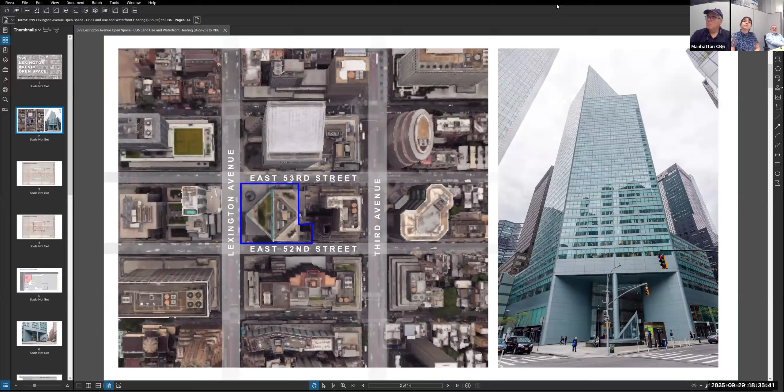So the 599 Lexington Avenue site has full lot frontage on the east side of Lexington Avenue between East 52nd Street and East 53rd Street. The 599 Lexington Avenue Commercial Office Building, which you see on the right-hand side, was constructed pursuant to a special permit in 1984.

The 1984 special permit was for major subway improvements, which granted a floor area bonus for construction of new entrances, subway connections between the 53rd Street Lexington Avenue Station and the 51st Street Lexington Avenue Station. The new entrances, marked in turquoise arrow on the screen, are widely used and located at the southeast corner of Lexington Avenue and East 53rd Street and along East 52nd Street.

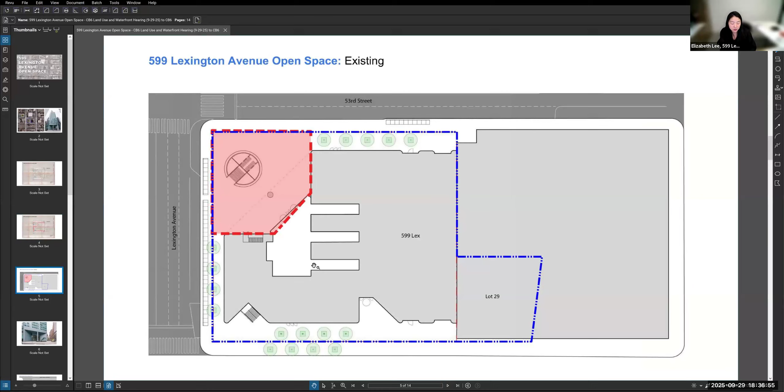Given all of the work the applicant has been doing in the area, including the Hub at 601 Lexington across north of East 53rd Street, the applicant also wanted to upgrade this space with pedestrian amenities that the community can use and enjoy. So in 2023, in coordination with the Department of City Planning, the applicant temporarily installed amenities on a trial basis to test fit the size, placement, and configuration of various amenities. Upon initial installation, the public's response was overwhelmingly positive, with increased usability of the space.

The next slide shows the layout of the pedestrian amenities, which includes 3 modular hexagonal seating and planter clusters and planter boxes for small trees and shrubs. This is what you see on the site today, and this is the proposed layout.

The clusters are strategically located so as not to obstruct pedestrian circulation paths and access to entrances, the subway, and the building's lobby. As you can see with the dimensions marked here, they're very generous and provide no obstructions for access to the subway and the entrance to the lobby, right at the cursor where I'm pointing. The planter boxes for small trees and shrubs are also placed along the edges to soften the edges of the buildings where it lines with the building's blank walls.

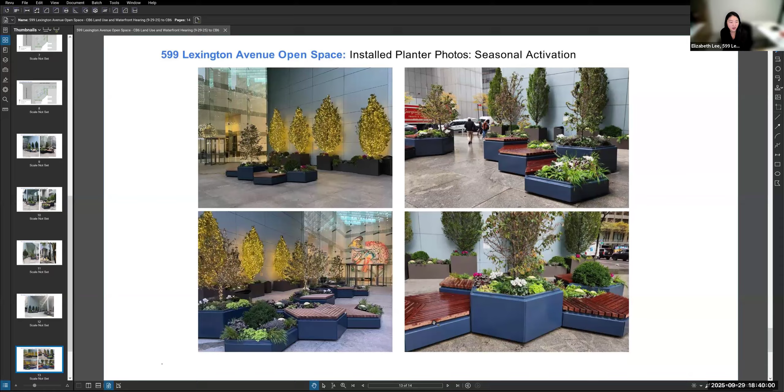We think these amenities, along with seasonal plantings and lighting, really create a vibrancy of the space, creating an urban oasis in the heart of East Midtown. Lastly, in order to make this amenity a permanent feature, we have filed an application for a non-ULURP modification to update the previously approved Z-3 drawing sheet, which is essentially the site plan under the 1984 special permit. So that's the action that we are bringing before the community board.

Thank you. We'll take any questions you may have. Does anybody have any initial thoughts or questions?

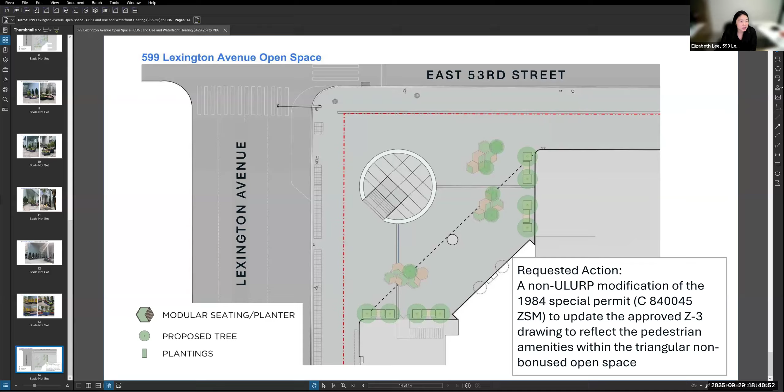Initial question: how does this area fit into the agreement for the MTA easement, which you mentioned at the outset? Yes, the easement agreements are actually within the entrances. So let me go back to the site plan. Okay, so the setback has nothing to do with that and it doesn't impact that easement. Correct, yeah. And then we had provided ample clearances—that's why we have the offset from the entrances.

Can I ask you a question quickly about the easement itself, if you are familiar with the responsibilities of the owner? Are you doing the maintenance of that structure over the steps?

I'll have to get back to you on that. I didn't review the easement right before this call, so in terms of the maintenance, we can follow up.

I just wanted to give you a heads up that the MTA board is voting this week to modify subway service so that the F train will return to this station. So the signage, if it's your signage, will have to be ordered. It's going to start in a couple of months. Ah, no, that's helpful intel. Thank you.

Any other questions? Good question. What is the total seating capacity? Right now, DCP has a standard for seating requiring a certain height and depth. We have 51 linear feet of seating meeting those specific height and depth requirements per the standard plaza regulations. However, we did not count other perchable or other seating areas that are slightly lower or slightly higher.

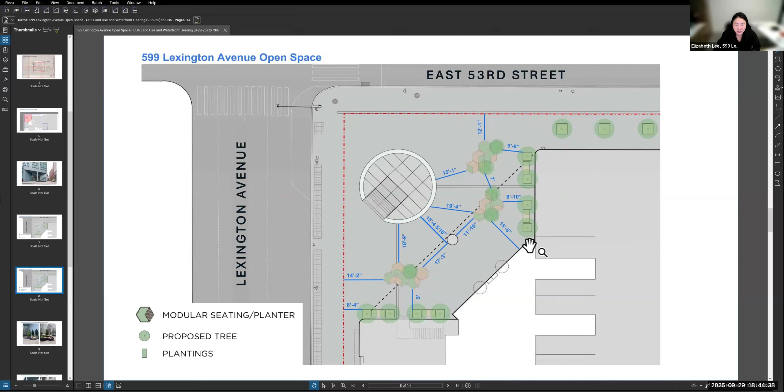We are proposing approximately 3 trash cans within this space that did not have trash cans. It's not marked here, but I believe one's located here, another is probably around here, and another at this corner. Okay, wonderful. It's like I can envision many lunches there. I'd like the lunch to be able to go somewhere when it's done.

Are there any more questions? Well, I have a comment. When I Google map 599 Lexington, it shows on Third Avenue. Well, it takes up a large part of it. No, but it's showing it like on the border of Third Avenue. That's probably Google's problem. Yeah, maybe, but maybe because they're working on it. I also live near here, and they, meaning the building, have special permits because they even have different street lamps and those kinds of things, so I think they own or in some way control most of the block.

All right, so generally, as a committee, are we feeling supportive? No objection. Yeah, absolutely. Does anybody want to write a resolution to that effect for next month? I was just saying, do we have an objection? It's a non-ULURP application. Do we have to? We don't have to.

The other thing I would say, we don't have to, but also if the committee were to write a resolution, it really needs to be passed at the next full board, because this was something that originally came to us over the summer. So it's thanks to the good graces of our sister agency, the Department of City Planning, that we were able to review it at this meeting to begin with.

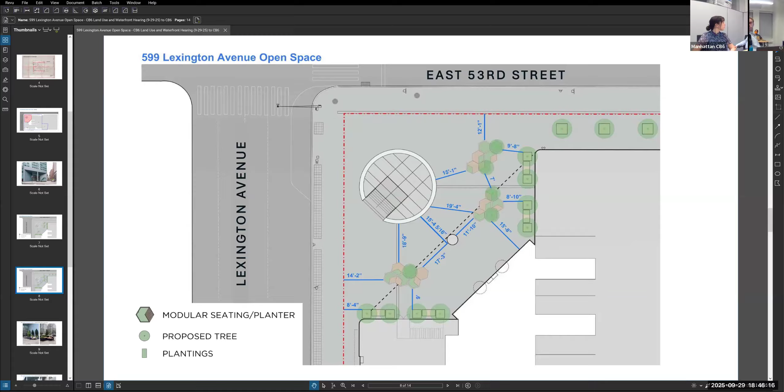Understood. I have a question for Jim. What is your understanding of the difference between no objection and a resolution of support? No objection is just that, no objection. Support is affirmative support of it. I'd like to propose that we be more affirmative in support, because it does seem to be the spirit on the committee that we really like this.

I have no objection.

Miss Lee, are you? We routinely do this with liquor licenses and what have you, so that if somebody comes up and says why did you guys approve this - approval versus no objection is different. It's not approval, it's that we express our support. That application can get you in trouble with people that oppose it.

Have we heard any opposition? No, not tonight. Miss Lee, are you guys looking for a statement of support specifically, or?

We'd appreciate the statement of support, since this will also be presented back to the City Planning Commission for their final vote. It would be wonderful to have community board support.

Understood. Larry, does that mean you're volunteering to write it? All right, thank you. It has to be seconded. I second, thank you. Okay, when I call your name, please say whether you are in favor, opposed, abstain, or not entitled.

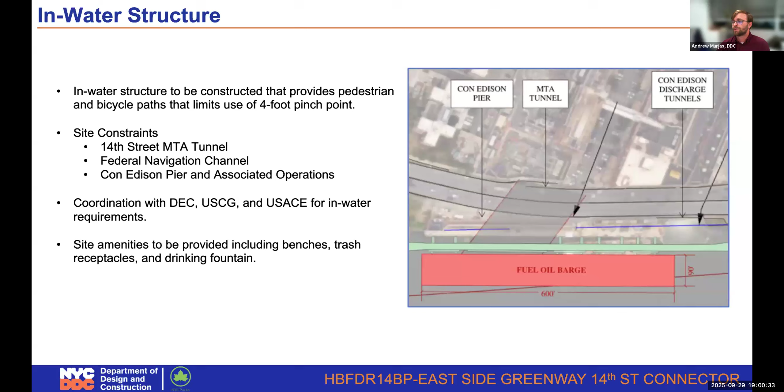But of course, the greenway itself, since this really is a project for the community, we want to make sure the community gets to enjoy the structure. So we're providing several amenities like benches, trash receptacles, and drinking fountains, just to make sure that it's welcoming, but also steers away from that 4-foot pinch point.

So on the southern side of this structure, we're tying into East River Park. This is critical for us since this would also be the point of entry for all of our utilities that we require on the greenway structure.

Now, the reason why we wanted to share this update with you for this connecting point is because we know that the East Side Coastal Resiliency Team is already in construction in this area. It's close to the public. They are on their own schedule to move forward to give back to the community with the East River Park project.

So they will be completed with construction, we're anticipating, before we even start construction with our greenway structure. They will be completing all of the different elements within East River Park. However, they are reserving just the surface elements on the northernmost part of the East River Park, including the basketball court, so that the design builder can utilize that for staging, for mooring their ships to go do the work out in the water, and also to navigate around the connecting point of the greenway structure. I wanted to highlight that area will remain closed during our construction.

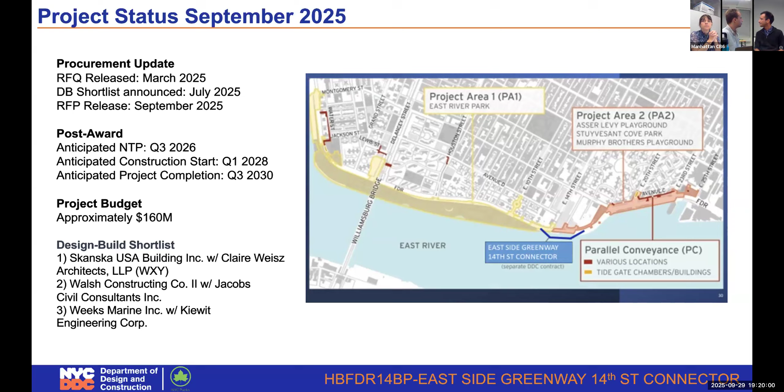Daniel? I want to go back to the closures you talked about. I'm curious if you could clarify the timelines. I don't know exactly when the East Side Coastal Resiliency Park is supposed to open, but the basketball courts are open, and then at some point, quarter 1 2028, we start the Greenway and close those basketball courts. Is that how this works, or do the basketball courts never start until the Greenway is done?

Correct, so we're going to absorb the basketball courts as part of our project. Essentially the final surface elements—they'll do everything underground, all the utility connections and so on, and complete all of that. But we'll do the final surface elements, including the basketball court, the spray showers, the drinking fountain in this northern part of the East River Park, so that we can utilize that for staging, for our trailers, and for access to our boats to go out into the water. That section would remain closed throughout the end of our construction.

And during the whole next 5 or 6 years until it's done, the pinch point is still open and can go through this construction to the rest of the park? That's right—you see the gray path here at the top, that would be open, which is to the right, page right of this is the 4-foot pinch point. They're going to complete that section, which will remain open for the community, and we'll just have this orange section here that would remain closed for our staging.

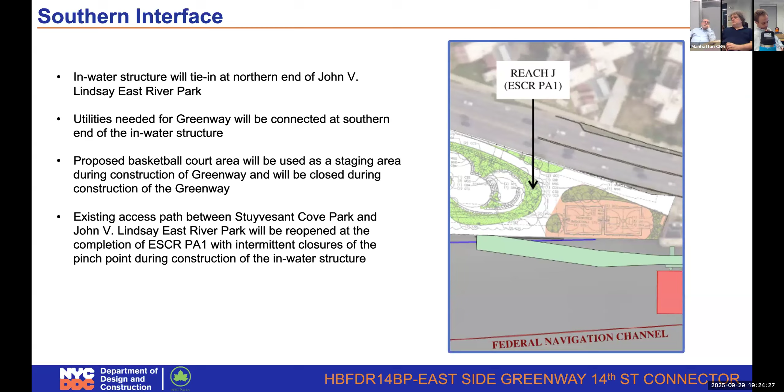Thanks. I want to return to the Patrick J. Brown Walk. That is a reconstructed bulkhead with fill behind it, correct? That supports not only the walk but the FDR Drive off-ramp and roadway itself? Correct. Okay, and there are pilings existing there, or aren't any under the wall?

There are piles there, yes. Okay, now you're going to connect in with that, and when you do that physical connection, wherever it's chosen, you may have to close the walk for a period of time to affect that. And obviously we'd like to make sure work is done outboard of it as much as possible, to minimize that closure period.

But once that connection has been made, every part of the Patrick J. Brown Walk south from that point all the way to the pinch point will no longer be used. So I want to ask you, does this request for design build include the permanent changeover of that to something different?

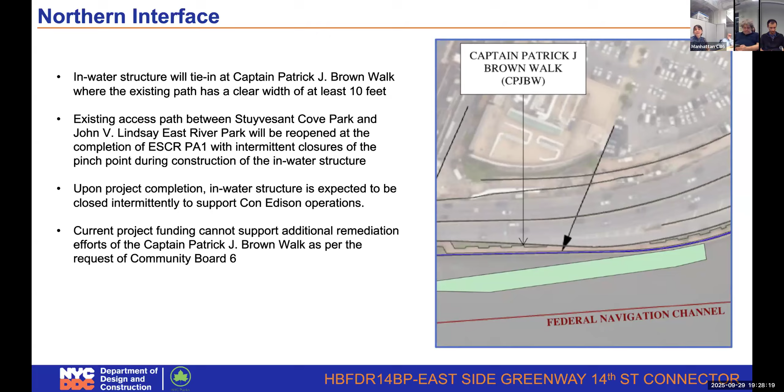We're going to move forward to the discussion of faith-based affordable housing, which is the New York State Senate bill currently in committee. I think Brendan will pull it up for us on the screen. This month we just wanted to talk about how the community and the committee is feeling and get a sense of that before we move forward on specific resolutions we might want to put forward in different capacities, but Gabe, the chair, who's not here with us today, wanted us to have more of an open discussion.

This is actually something I have been following for a long time. I even attended one of the hearings on this faith-based housing, and I feel very passionate about the fact that so many things are colored with the affordable housing label in order to cover all kinds of misdeeds and overall greed that happens in this city. I'm all for housing, but I'm absolutely not for doing away with environmental, zoning, or landmark reviews. This bill basically gives them a blank check. You could do whatever you want with your property. They're trying in all kinds of ways to eliminate input from the community, be it the charter commission or the faith-based housing, or a million other ways that they're trying to keep the community away from the process so they can have a free hand.